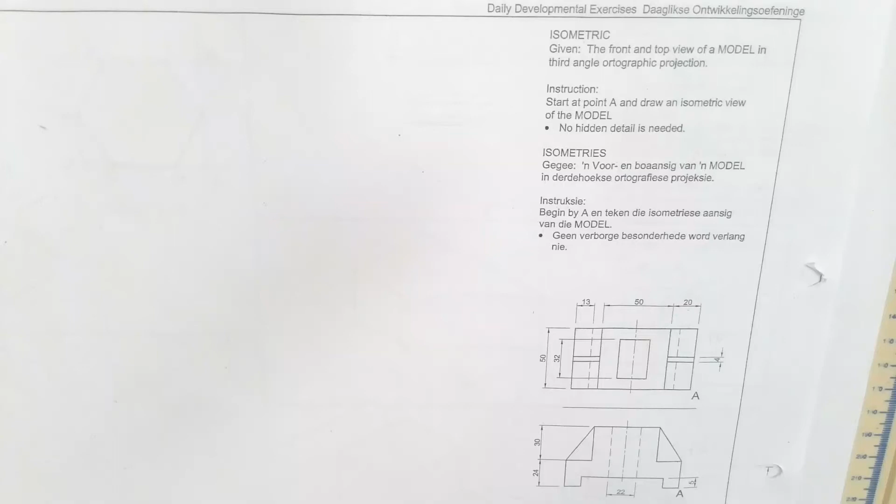We are given the front view and top view of a model in third angle orthographic projection. In fact, there should be an H there.

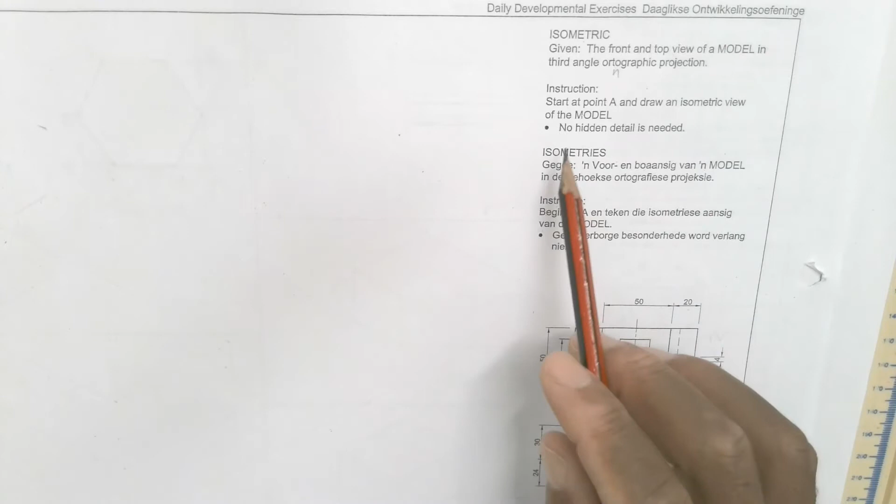Instructions: start at point A. Where is point A? This is point A, and this is point A.

Now, which one of these views is a top view, and which one is a front view? This is your top view, and that is your front view.

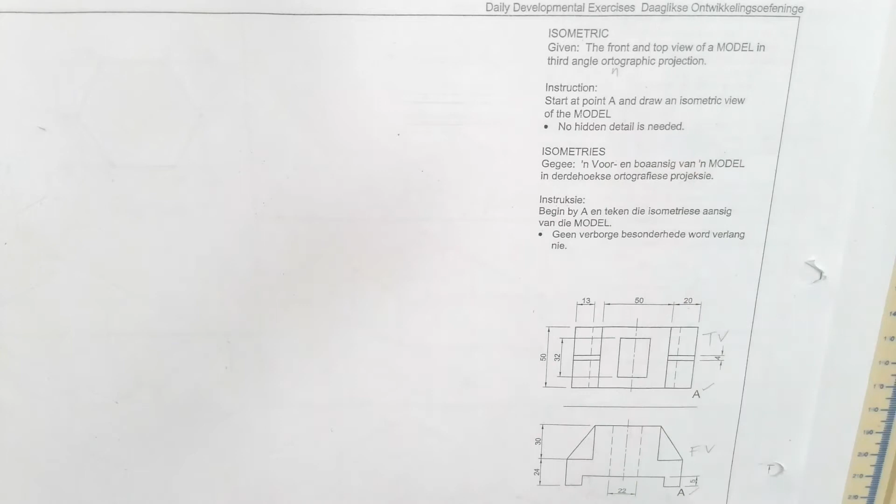Let's continue. Start at point A and draw an isometric view. They're saying I must start at point A and draw an isometric view of the model, and I should not show any hidden details. Therefore, everything I do here must have no hidden details.

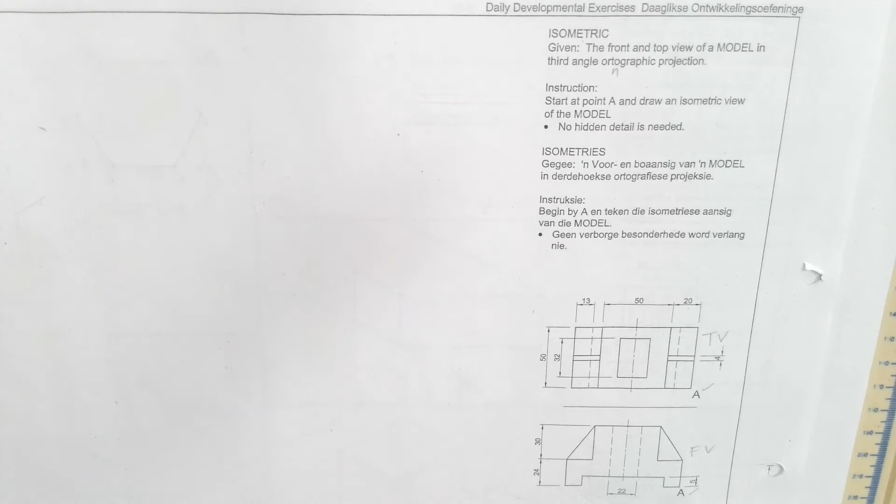So what I choose to do is look at the two views, then construct a freehand drawing of the answer of what I need, without using any of the dimensions.

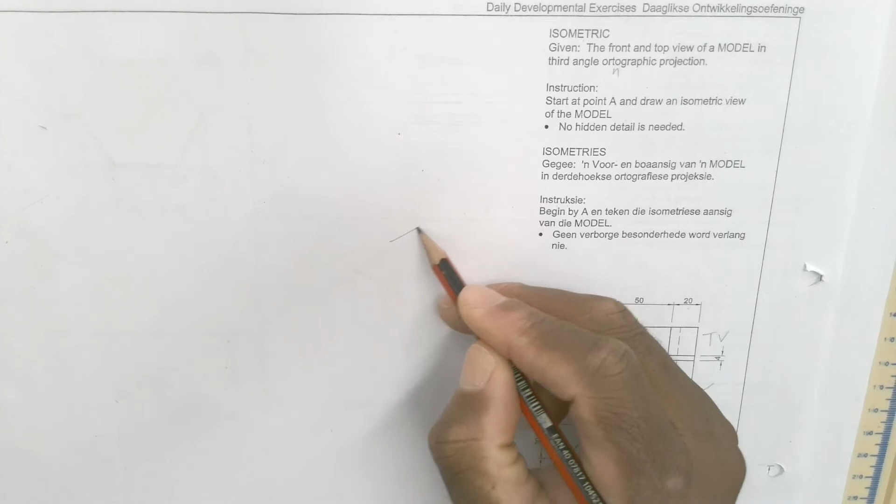I try and say, okay, that should be A there, going to the left hand side. Mind you, there's something happening there. So what I do is draw my freehand like that. Okay, and that is my freehand.

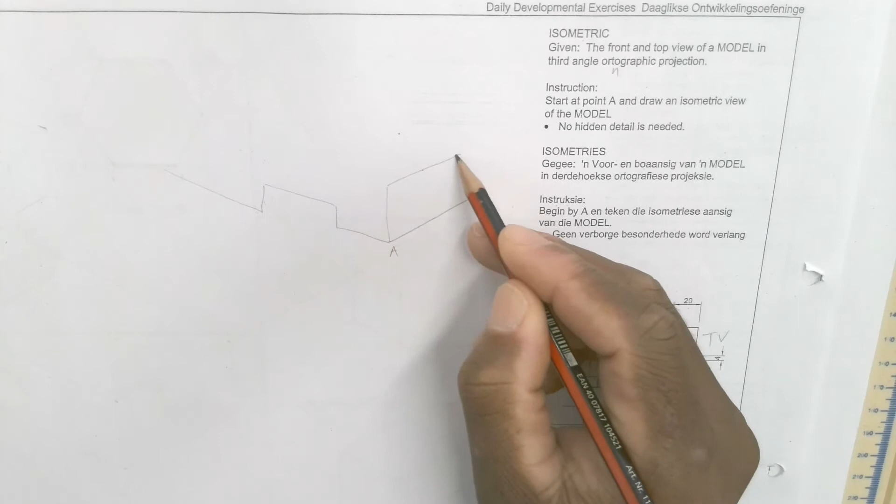Now, never mind that it's skewed, because it's freehand, you are allowed to do that. It's okay, because what you want here is to get the actual answer. That's what you do.

Then that goes up, that goes across. There's something happening there, remember that? There's something happening there, which is this part here, which is what we see there. And then it goes there, then it comes down.

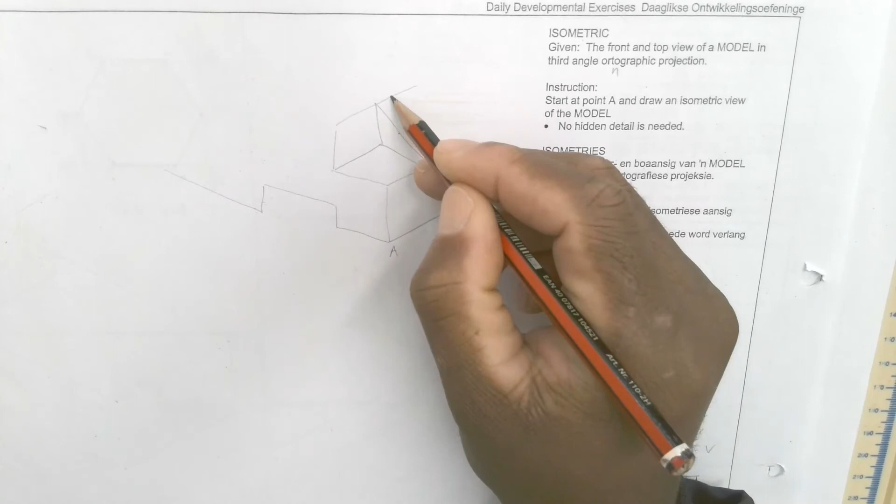So this is what we're getting. So that's what should happen. All right, so this goes up.

Now you have the right hand side almost done. Then let's complete the top part. Top part is like that. Never mind that that is skewed, but now you can straighten it by just doing that.

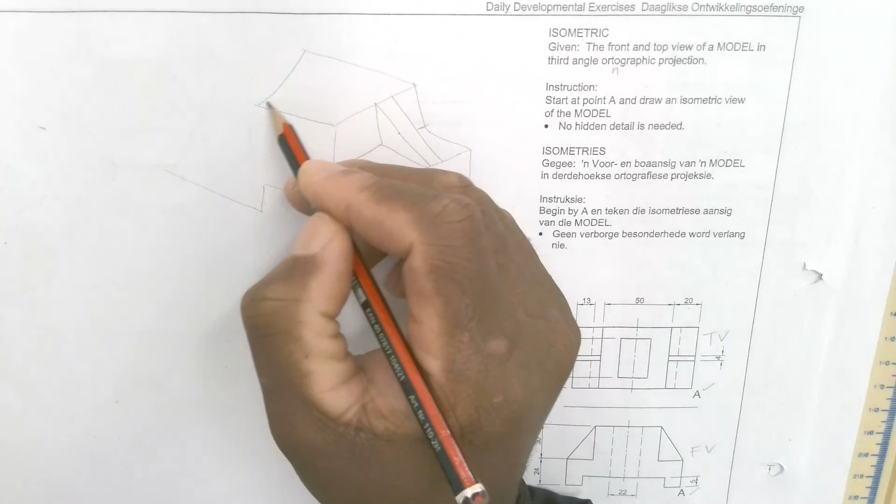Now there is this hole here, which is a through hole. So it means that should be going that way, that way, that way, and that way, and it goes down since it's a through hole.

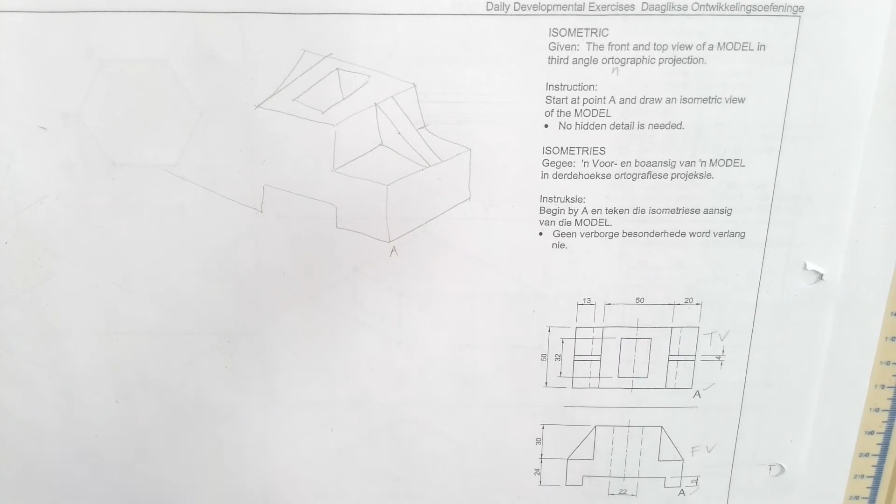So now that I've done this part here, I can see that this part and that part are both identical. Therefore, it's simple. Comes down, goes across, comes down, goes across, goes up as a rib, goes in, and then goes across again, goes in, goes across, and then this goes out.

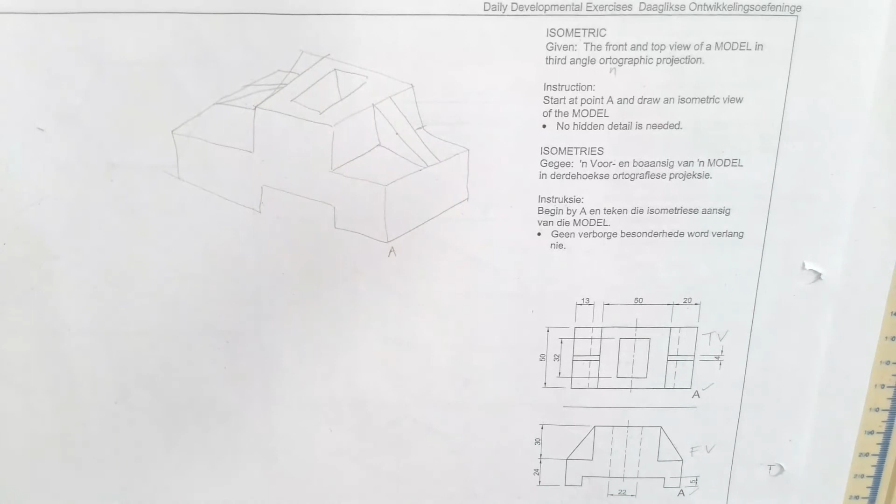Now, remember this is freehand. You're not sure whether you're going to see that part or not, but just so you get an idea of what this thing would look like. What is important is that you've already drawn a freehand drawing.

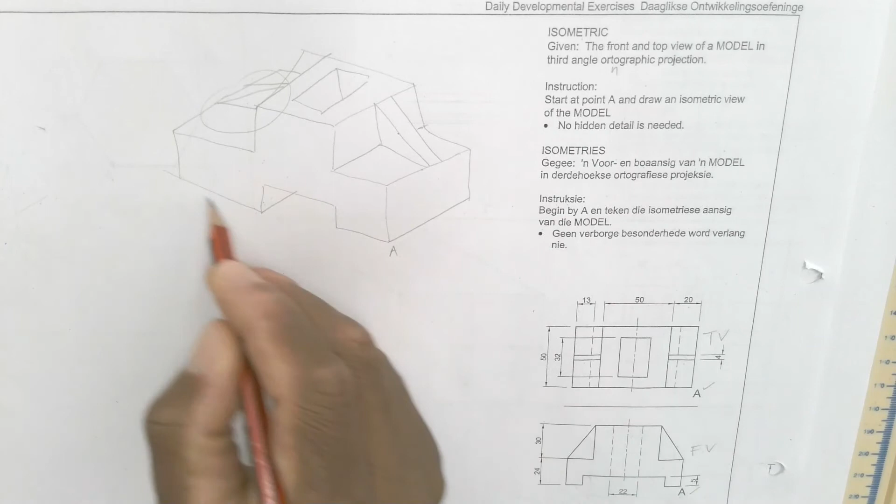Now, if you look at it here, if you study it correctly, A is on the right hand side of this front view here, from right to left. Therefore, this is correct, from left to right, which is that position here.

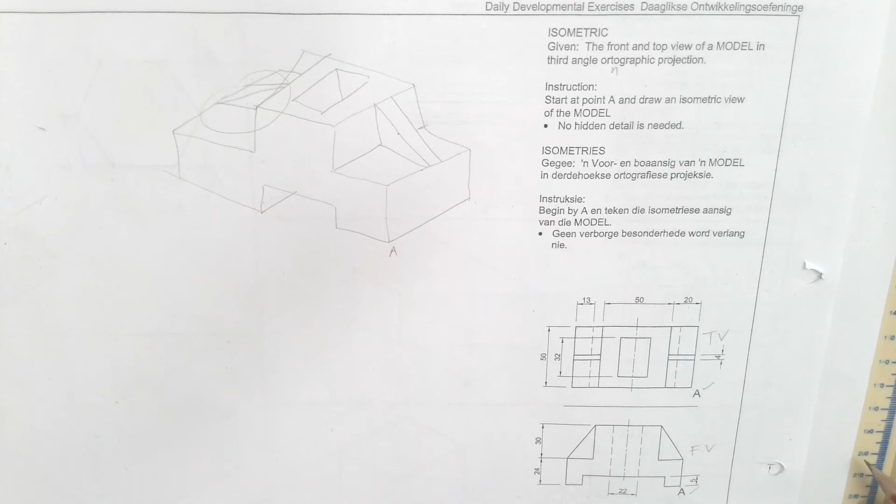That is very important and critical in orientation, because marks are given to how the drawing is supposed to be orientated. So if the drawing is incorrectly orientated, you may lose marks. So it's important that we look at how A, and where A, is positioned.

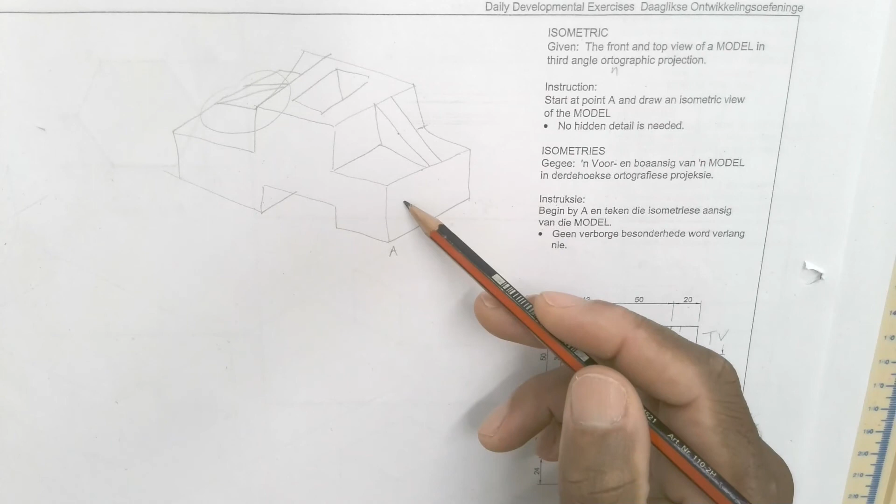Then from there, it becomes easier. I know this may take about 2 to 5 minutes in doing that, but rather you do freehand first before you move on to instrument drawing, because once you move to instrument drawings and you have your freehand, it's easier to know exactly what needs to be done. In that way, your work becomes much more easier.

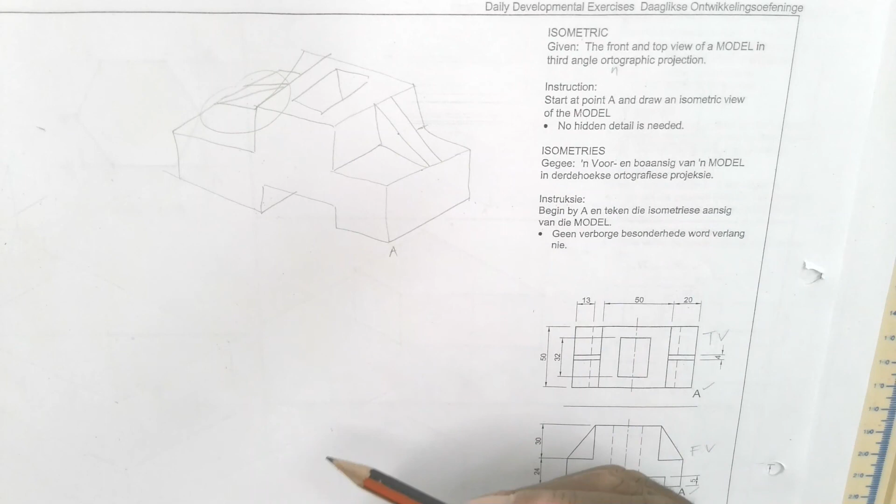Now I'm going to move on to using the actual instruments. In so doing, it means I'll be working a little bit faster, because now I have an answer, or I have an idea of what I will need to do.